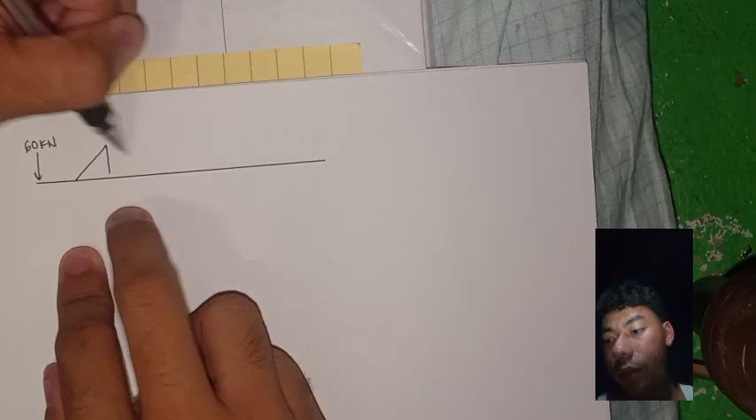Good evening everyone. So we're going to solve a cantilever beam with a trapezoidal load on it. So we have here a trapezoidal load with 23 kilonewton per meter, a point load of 60 kilonewton, and a hinge at D.

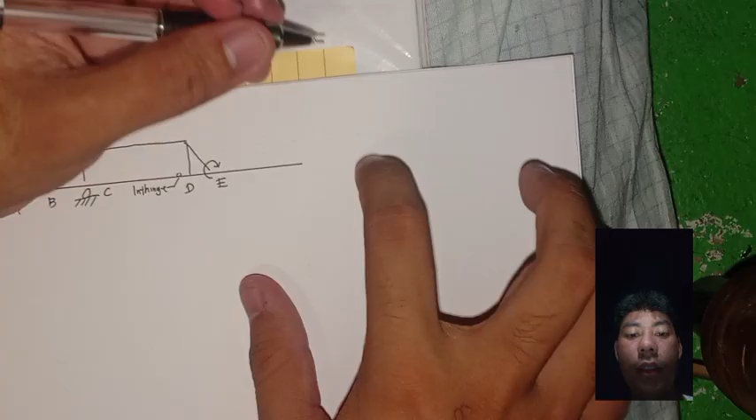So we're going to separate this beam into two parts. I'm just sketching, and it has roller support at C and a fixed support on its end. So we have one reaction per roller and three reactions in fixed support. I'm not going to include the horizontal force because there is no force horizontally.

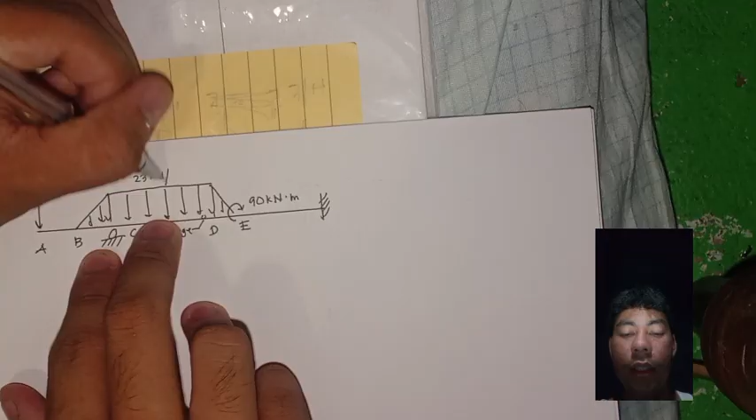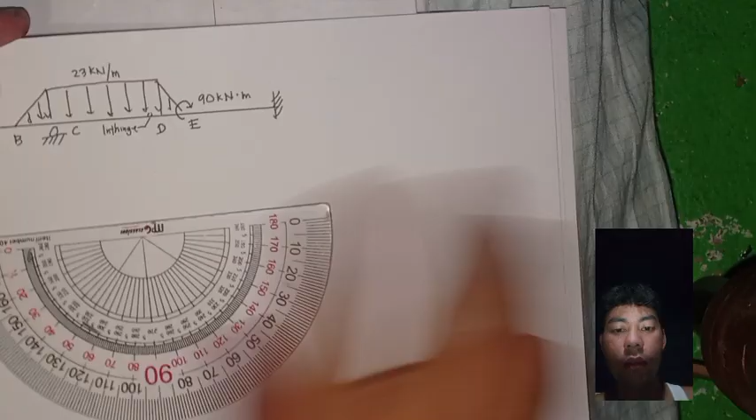So I'll divide the load into two parts, exposing the internal hinge and internal forces. I'm just sketching the loadings of two parts. So I'm going to write internal forces at D with opposing direction, just assuming the directions. And this is the roller support.

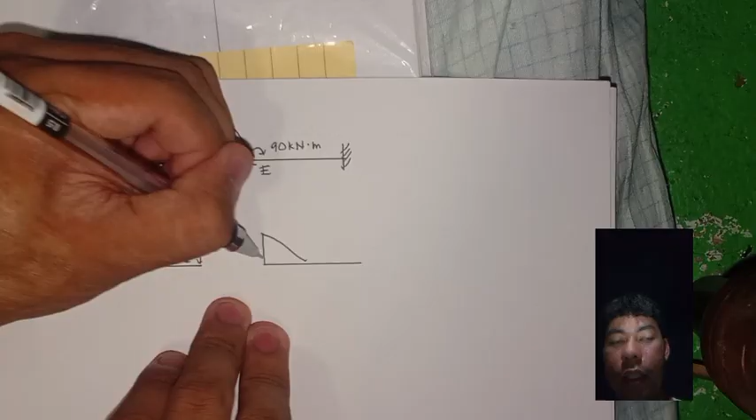So there is an upward Dy and an opposing direction of downward Dy. We're going to solve the external forces using the Dy, satisfying the three unknowns for our equilibrium.

So I'm going to solve this beam in two parts. First, I'll solve the resultant of each segment, which I'll call R1, R2, and R3.

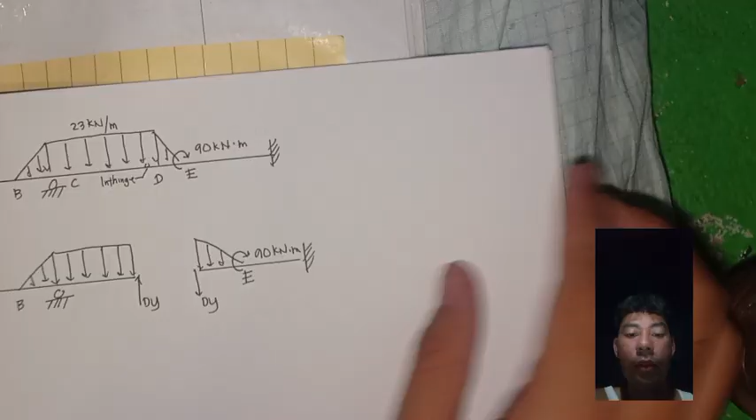There is an upward force in C, which is CY, and since it's a fixed support there is RF, so I'm going to call it RF, and moment of F.

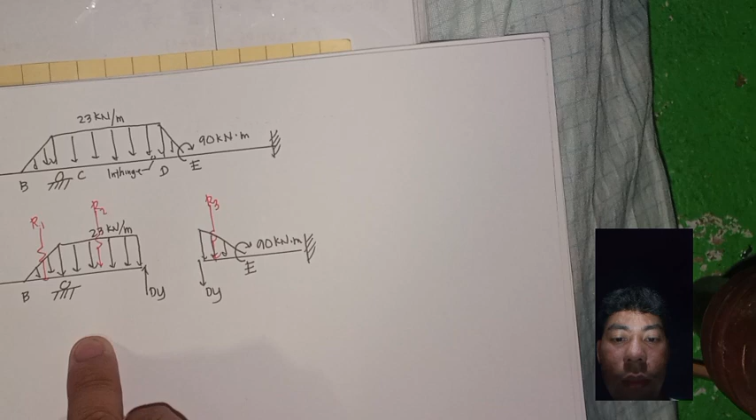So I'm going to solve it separately, starting with the left side. I'll sum the moments at C so I can find the support reaction at Dy.

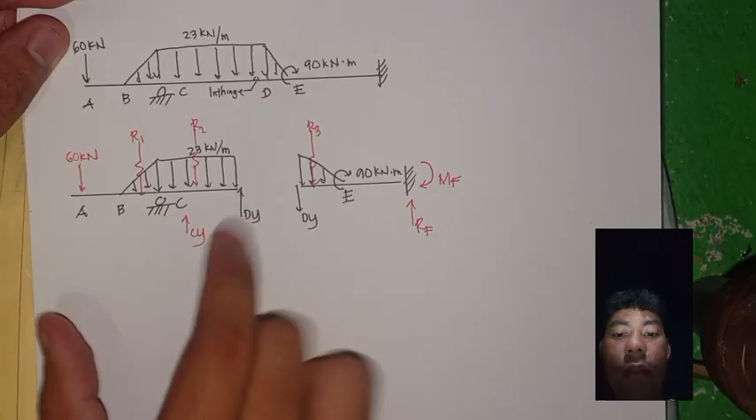Taking clockwise as positive, we have negative 60 kilonewton with the moment arm of 5. I forgot to put the distances: from A to B is 2 meters, from B to C is 3 meters, from C to D is 7 meters, from D to E is 2 meters, and E to F is 2 meters.

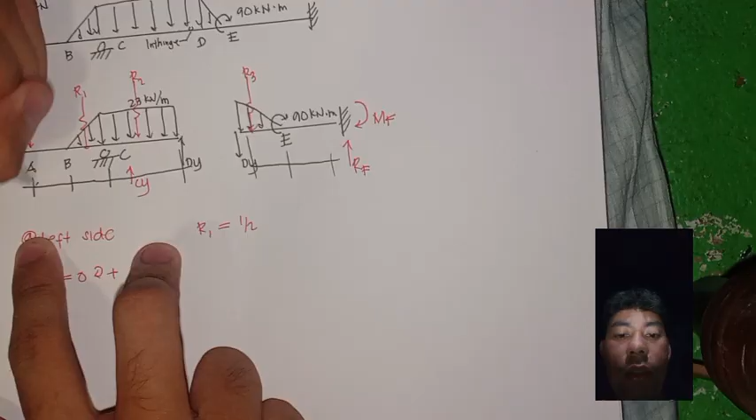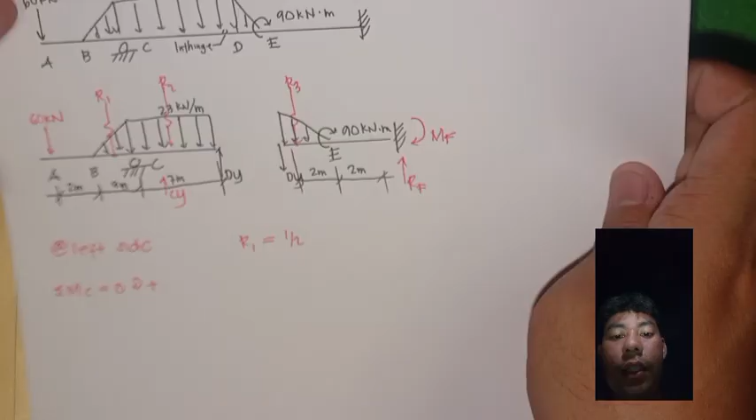So I'm going to calculate the resultants first so I can calculate the other reactions easily. R1 is 1/2 of 3 times 23, which is 34.5. Then R2 is just 23 times 7, so it is 161 kilonewton. And lastly R3, which is 1/2 of 2 times 23, or simply 23 kilonewton.

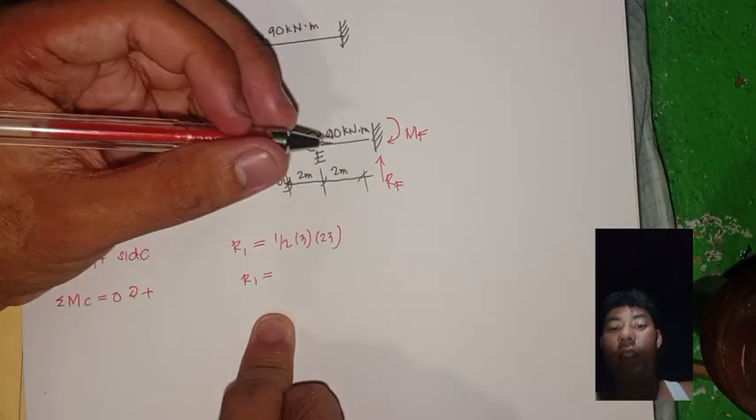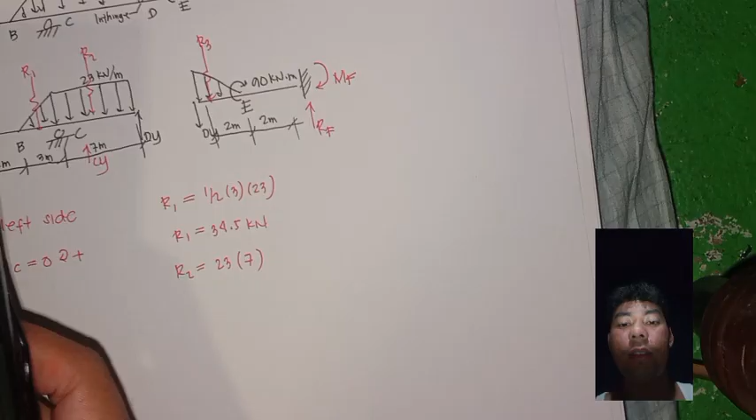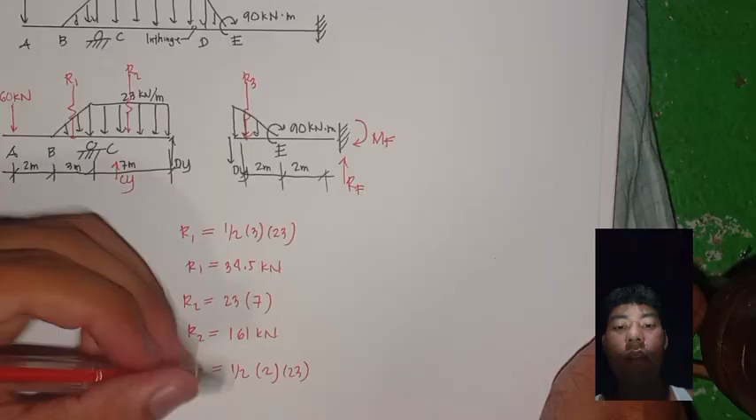Since I got all the resultants, I can find the support reactions easily. At the left side, taking the sum of moments about C, considering clockwise as positive: negative 60 kilonewton with a moment arm of 5, minus R1, which is 34.5 kilonewton with a moment arm of 1/3 of 3, plus 161, half of 7 is 3.5.

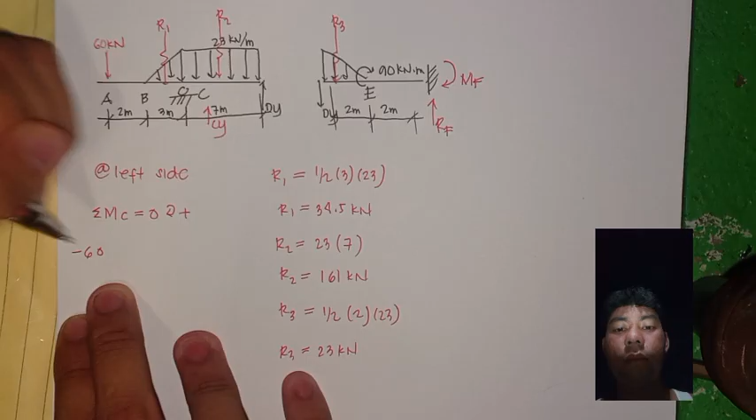So our Dy is 32.714.

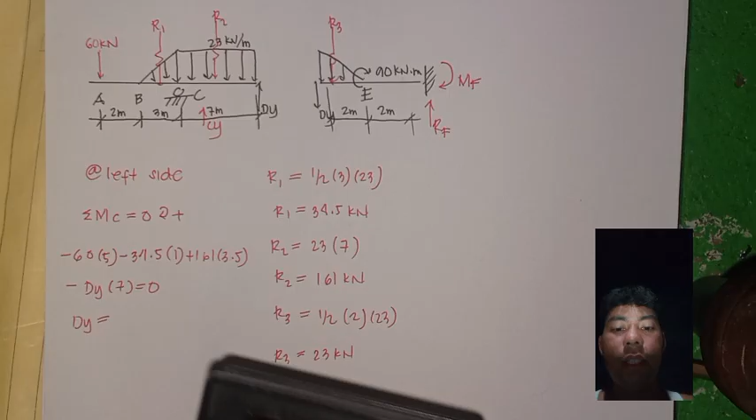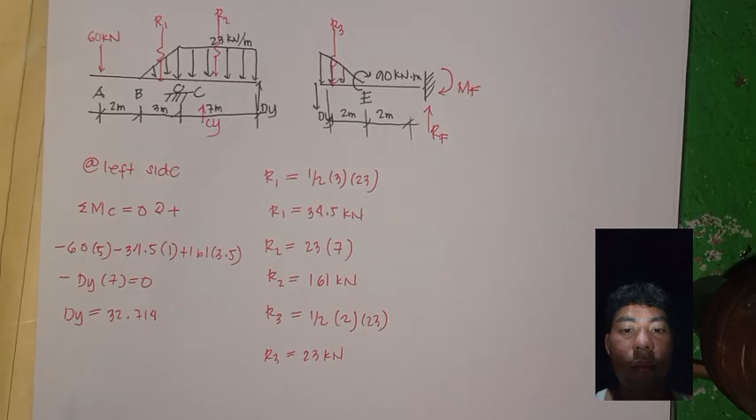The next step is to take the summation of forces along Y, considering upward forces as positive: negative 60 minus R1 plus CY minus R2, plus Dy, since we got the Dy, is equal to 0.

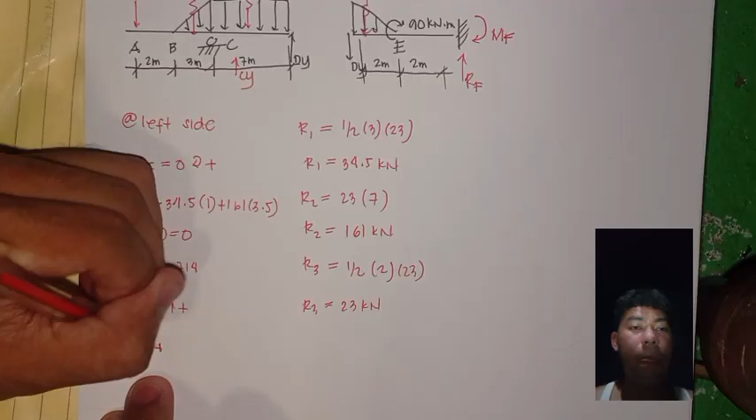So we can get the CY of 222.78.

So now I'm considering the right side because I got all the support reactions at the left side. I'm going to take the moment about F so I'll be able to get the moment at F, since I already got the Dy.

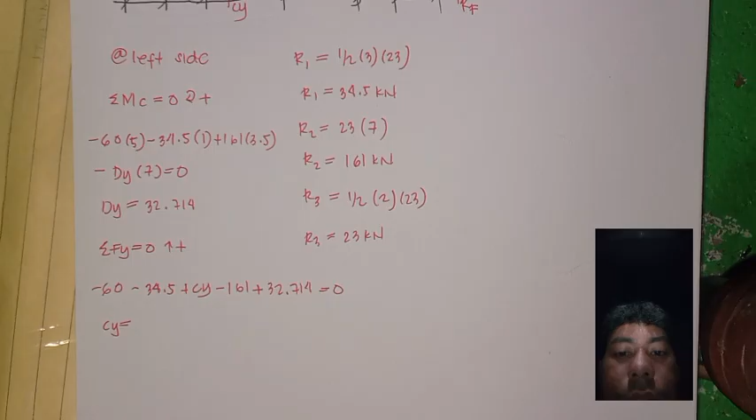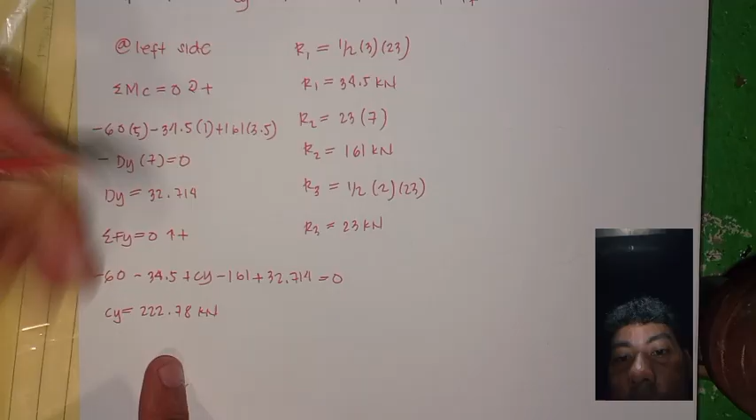So summation of moment about F, considering clockwise as positive: since I got the Dy and it's downward, being the opposing reaction, it's negative Dy, which is 32.714, with a moment arm of 4 meters. Then minus R3, which is 23, with a moment arm of 2/3 of 2 plus 2.

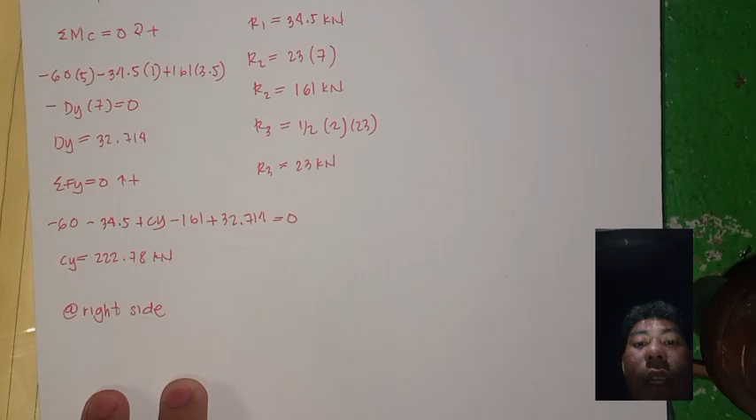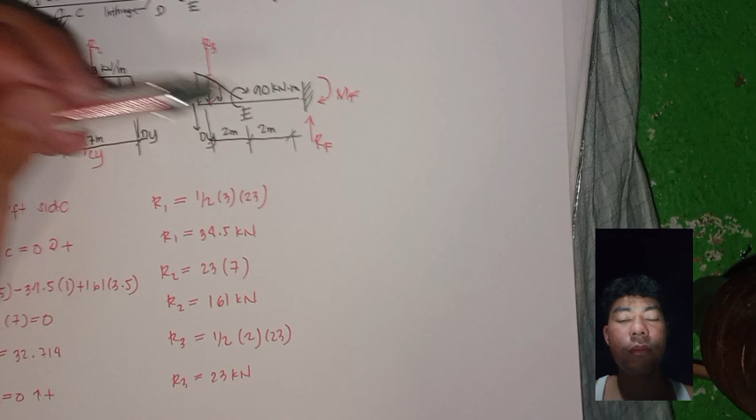Plus 90, which is the given clockwise moment in our beam, plus the moment of F, equals 0. So we can get the moment of F as 117.527 kilonewton meter.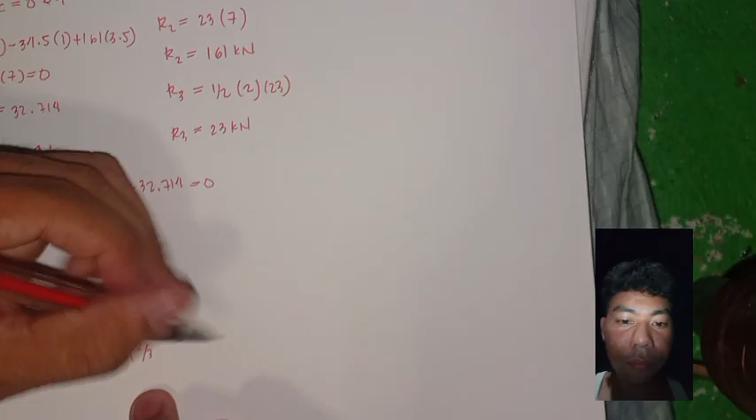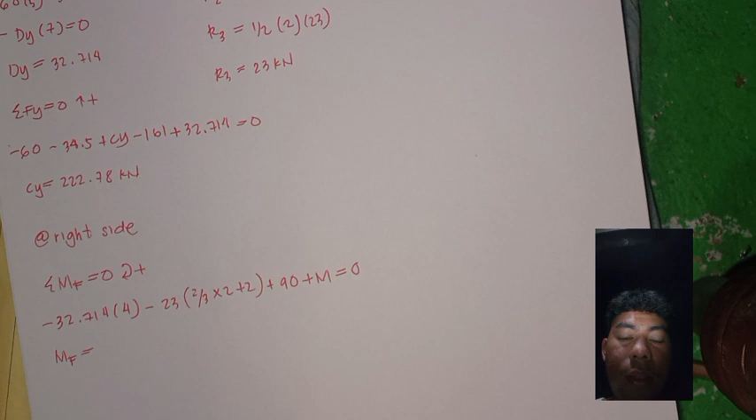So we can get the RF by summation of vertical forces along Y, considering upward forces as positive: since it's the opposing reaction, we get negative 32.714 minus R3, which is 23, plus RF, equals 0. So we can get the RF of 55.714 kilonewton.

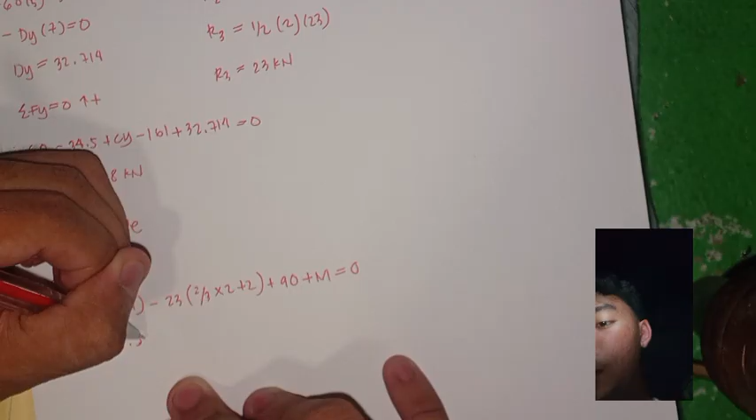So we got all the support reactions for the beam. Now we're going to put them back together again, returning to the original beam location. Here it is.

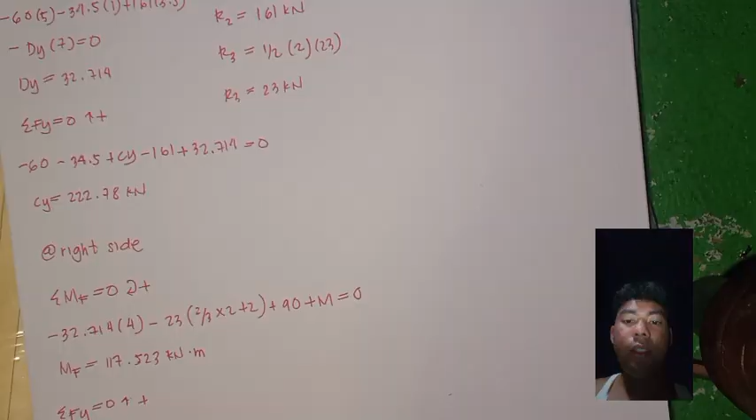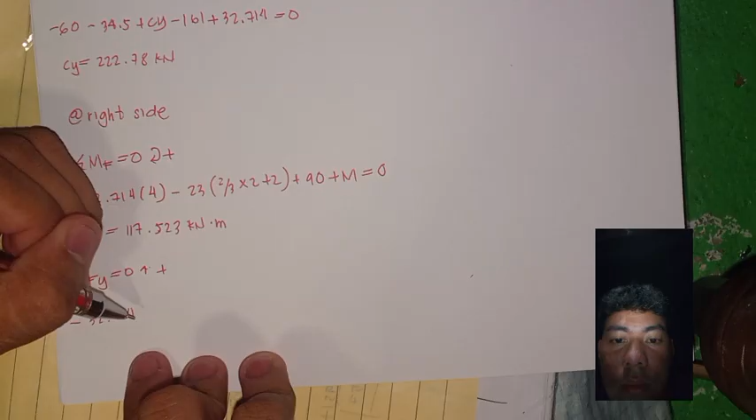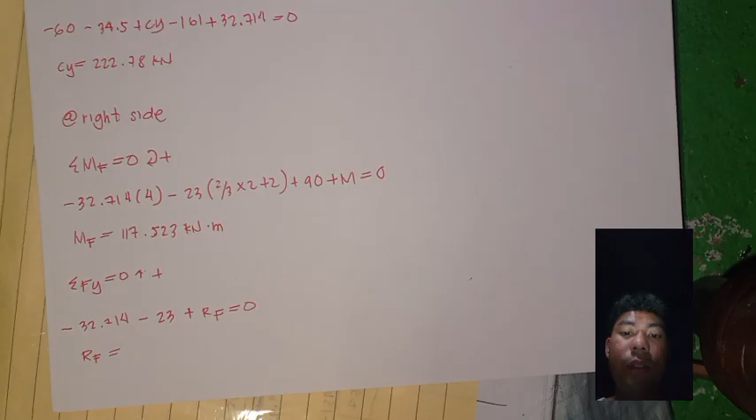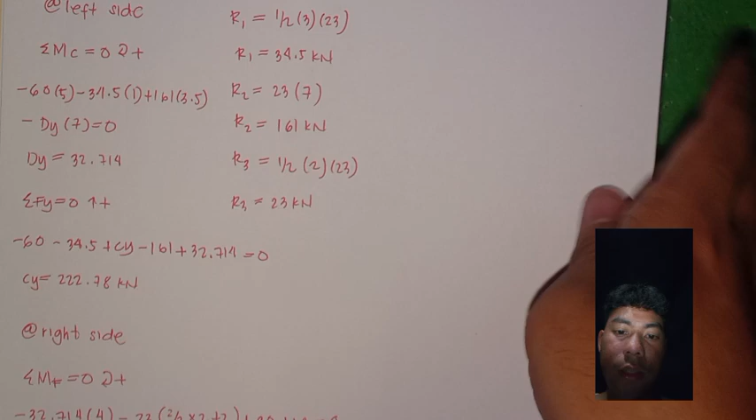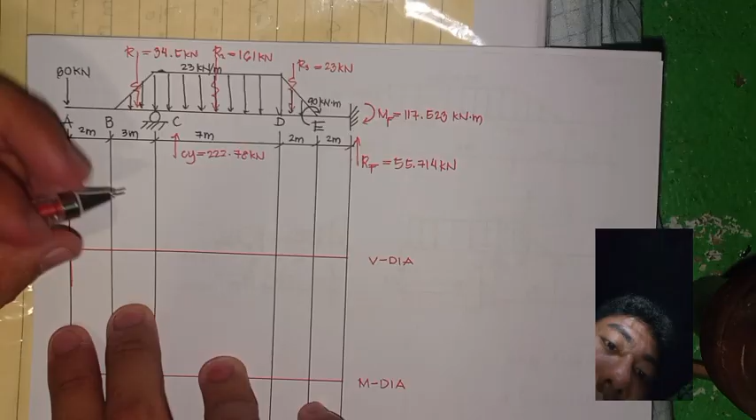Plus the area, so from negative 32.71, bababa ulit tayo ng, since minus natin yung R3 na 23. So bababa tayo ng 55.714.

So it's curve downward na naman since it's downward force at our loading. So lalakad lang tayo dito ng 2 meters since wala naman. So aangat tayo ng RF na 55.714, which is magsisiro yung shear diagram natin.

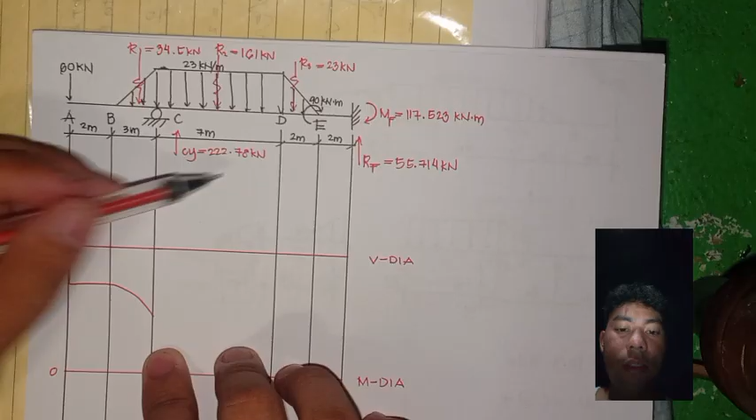Since nakuha na natin yung shear diagram, magpo-proceed na tayo sa moment diagram natin. So magbibase tayo sa area ng shear diagram natin, which is negative 60 times 2. So 0 degree, magiging 1 degree yung moment diagram natin.

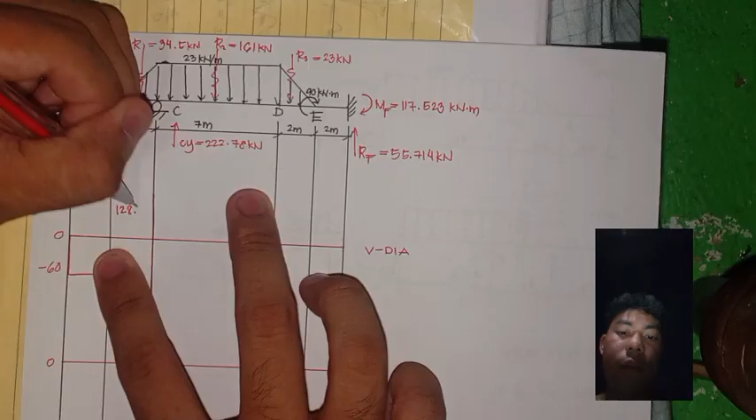So it's downward because it is downward slope, because our shear diagram at point A to B is rectangle, which is 0 degree. So we have 1 degree at our moment diagram. So it's downward slope. So we get the area.

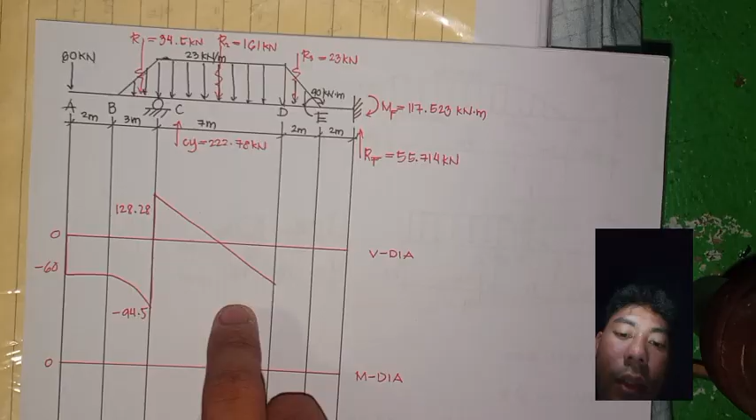Negative 120. So the negative 120 is we're going to subtract the area of B to C, which we're going to solve by using the parabolic and triangular method. So we're going to take the rectangular shape, then subtract the parabola here.

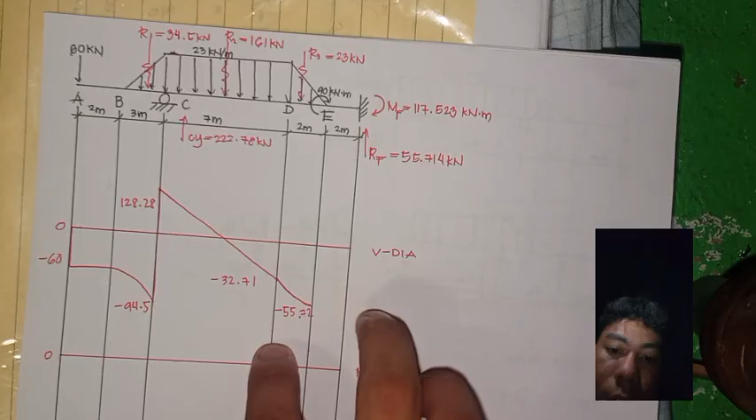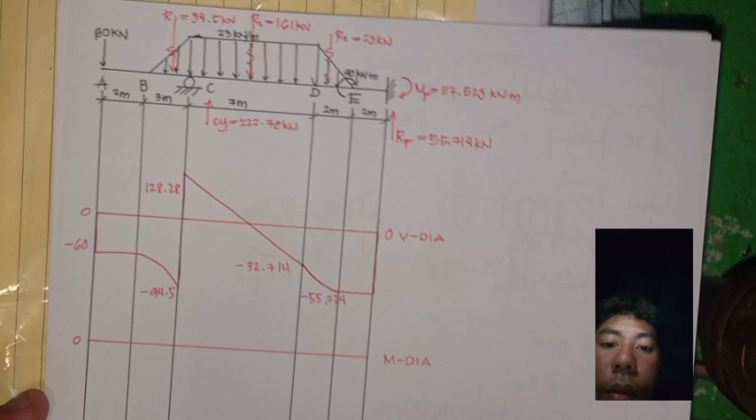We got the height of the rectangular, which is 94.5. So we're going to subtract the area of rectangle and the parabola. So we get the area of rectangle, 94.5 times 3, minus the area of parabola, which we all know is base times height over 2.

Plus 1, because our parabola is already 2 degree, so we're going to add 1 degree, so it's base times height over 3. So we're going to write the base and the height over 3. So we get the area of the parabola by subtracting the area of rectangle and the area of parabola.

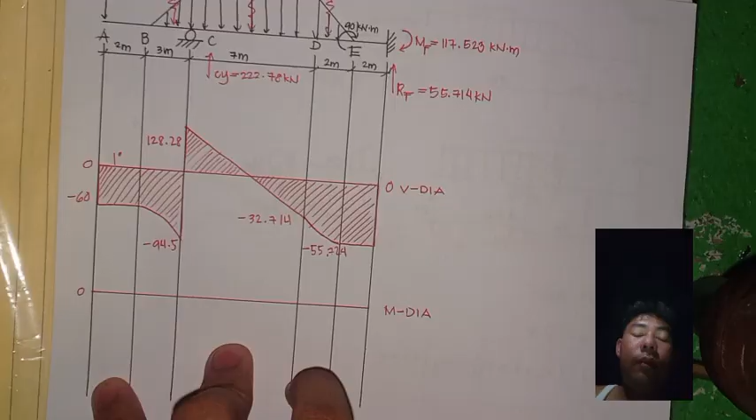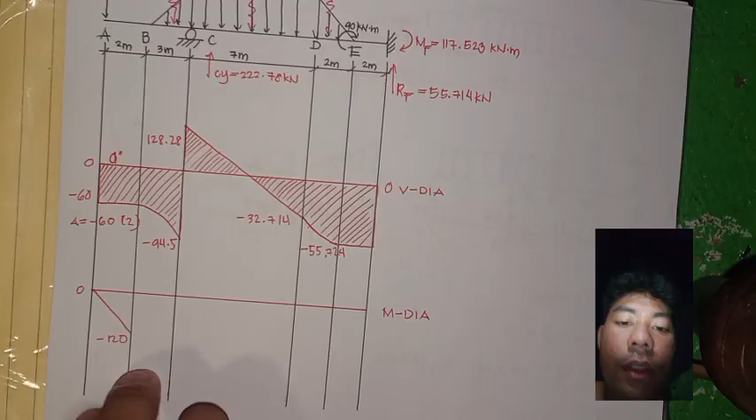So we get the area that's subtracted from rectangle and parabola. So it is negative increasing, so it is a sad curve, which is 374.5.

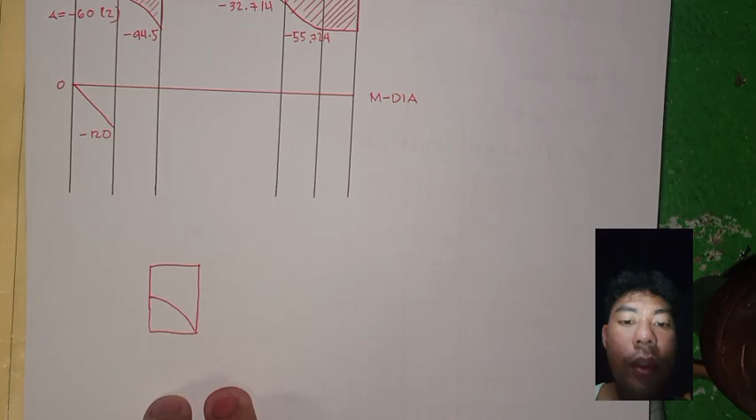Since we have 0 shear here, we're going to find the x distance of these two triangles. It is x at the first triangle of base, and then the base of the second triangle is 7 minus x. So we're going to solve it using ratio and proportion, basis to height and basis to height. So we have the x distance at the base of first triangle and at the height of 128.28, and then the 7 minus x, the base of second triangle, and the height of 32.714.

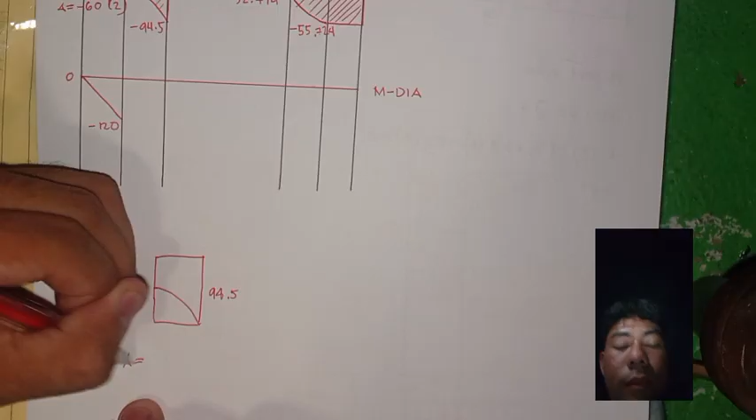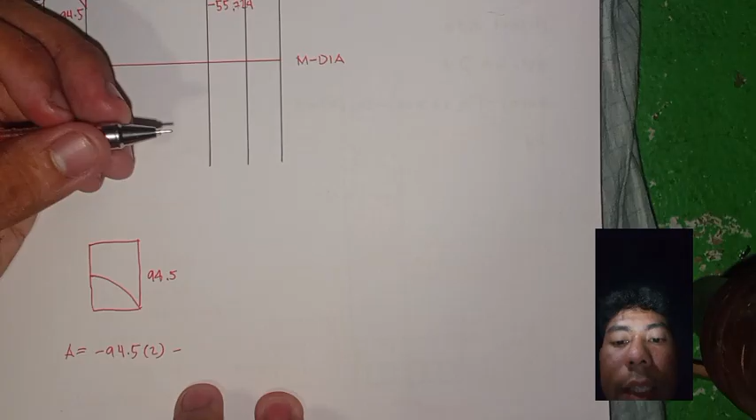So upon solving, we will get the x distance of 5.578. So we can now solve for the area of the triangle here. It is 1/2 base, which is yung 5.578, times the height of 128.28. So we get the area of our first triangle of 357.142.

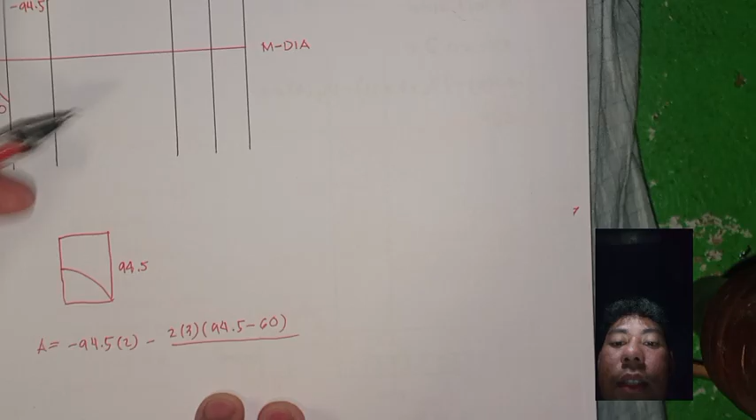And we will get the area of the second triangle after we subtract the negative 374.5 at the area we got at the first triangle. So it is positive decreasing, so it's a sad curve upward. So we get 23.26, which we will subtract at the area of the second triangle.

So upon solving, we will get the moment diagram at the second triangle. Now we get the area. We will subtract it since it's downward, so it's a sad curve again. So we get 0 shear at the end of the second triangle.

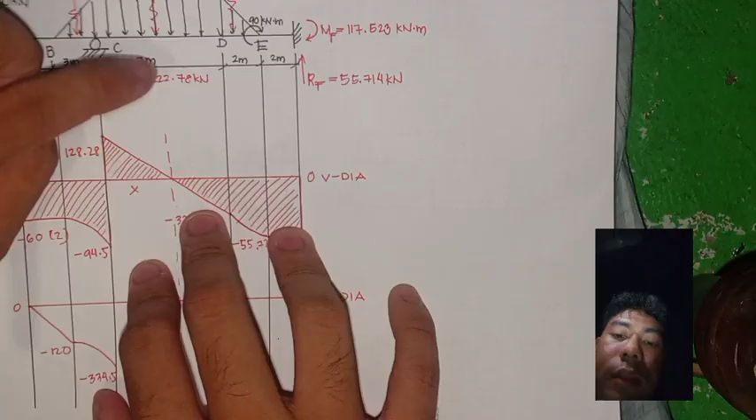So now we will get the spandrel, like what we did earlier. So we're going to get the area of spandrel by using the total area of rectangle, just like what we did earlier.

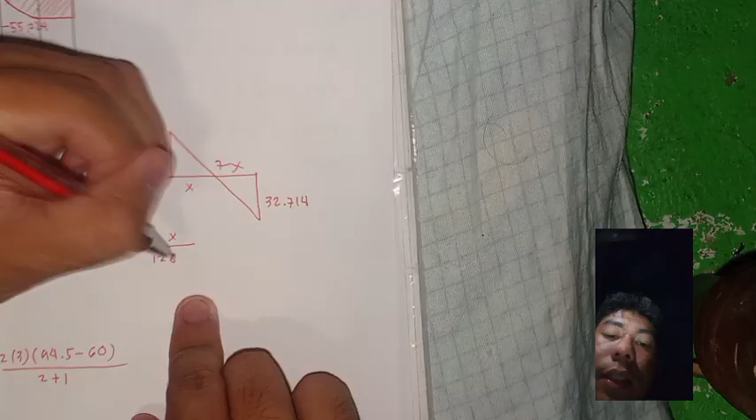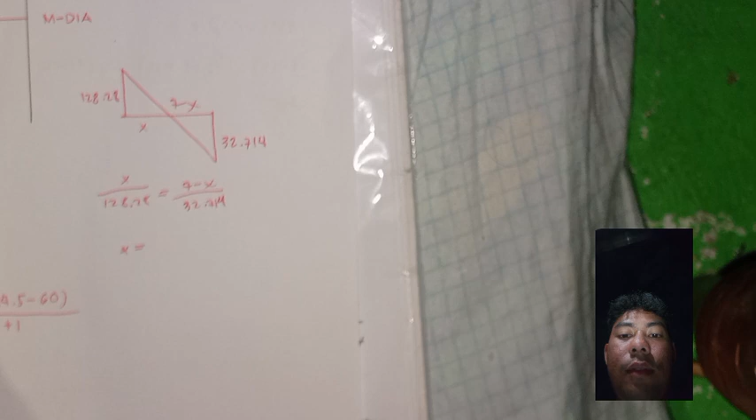So a rectangle with a height of 55.714. So we'll get the area of this by subtracting those heights. So upon solving, we'll get the area and then subtract it.

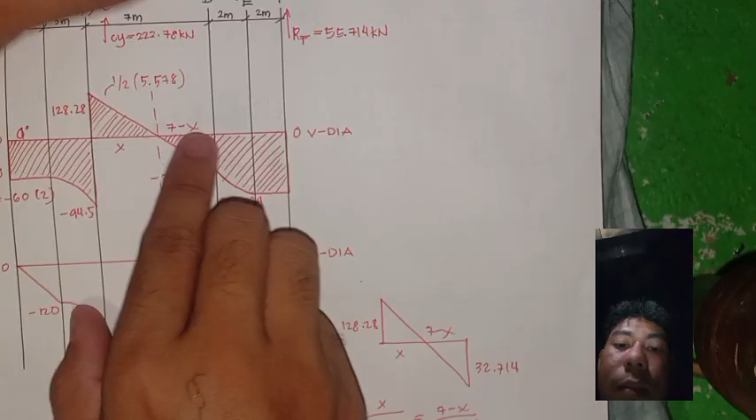So we will get a negative 96.082. Since we have clockwise moment at our beam, we're going to subtract it by our last value. So we will get negative 6.092, and then we're going to subtract it by the area of this rectangle.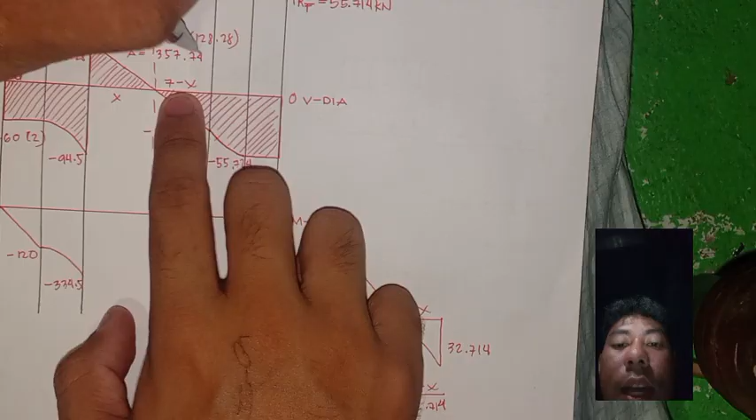So we will get negative 117.523. So aangat siya by RF na merong by our moment na merong 117.523. So we will get the zero moment.

So we have the maximum shear, which is 128.28, and the maximum moment of 334.5 kilonewton meter. So that's all for our video.